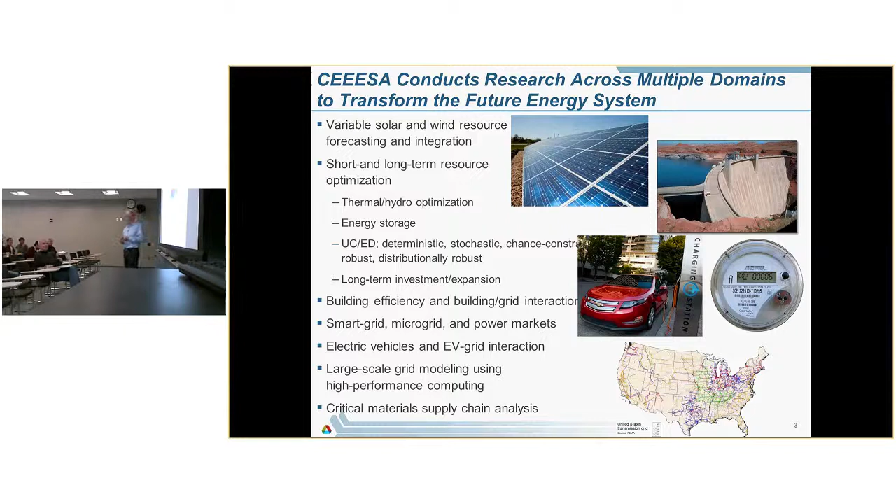And the group that I work in, the Center for Energy, Economic and Environmental Systems Analysis, we do work across a range of areas within power and energy systems. Some of them are listed here. From forecasting of renewables to optimization models for planning and operations of the power grid. And also, more recently, we are getting into things like cybersecurity, grid resilience, and also we have some large computers that we sometimes try to apply on power systems problems.

Okay, so what I plan to do today is I have a few slides first, which show some of the work that we have been doing on integration of renewables. And then the second part is more on energy storage. That's a relatively new project. So that's definitely work in progress, but I'll show you some preliminary results where we're looking at stochastic unit commitment with energy storage. And also a model where we try to optimize the energy storage bidding into day-ahead and real-time markets under uncertainty in prices from the storage owner's perspective.

Okay, so some of the motivation for this work, as you probably know, the U.S. power sector is a significant part of the economy, and perhaps more importantly, it's a large emitter of greenhouse gas emissions. And there has been and still is a rapid change towards more renewables. The installed capacity in the US and worldwide of wind and solar are shown there. And these are starting to have some fundamental impacts on how we operate and plan the power grid.

So one example here is from MISO. I guess we are in the MISO area now, right? Back at Argonne, we are in PJM, but here we are in MISO. So this is hourly wind power output a couple of years ago in MISO. So there is definitely variability over the course of a month here.

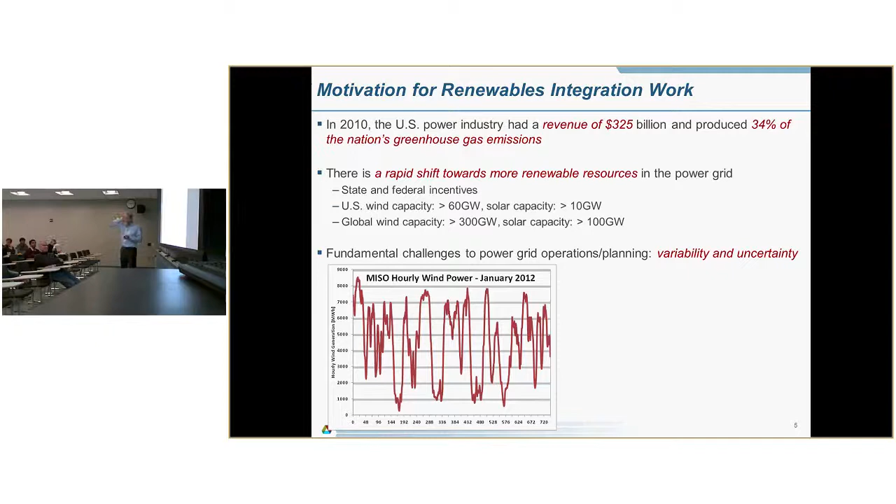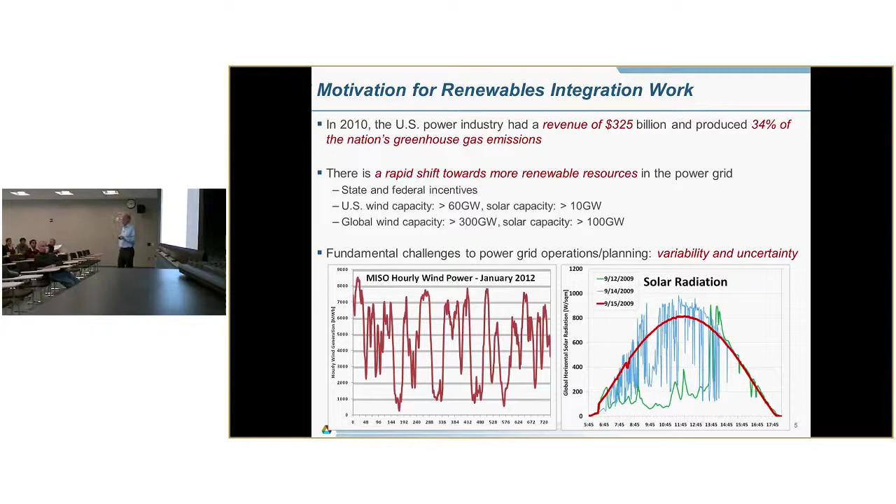For solar PV, this is just for one day, one specific site, the irradiance. For a sunny day, the red line. For a cloudy day, the green line, and then a day with intermittent clouds, which is the blue line, which is very hard to forecast, at least for a single individual site. So the key is to address these variability and uncertainty issues in power grid planning and operations. And also these things have impact on electricity markets.

The argument is that in addition to making a deterministic point forecast for how much wind power you will have for the next hours and the next day, it's important to estimate the uncertainty in the forecast. And we have been looking at one method which is called conditional kernel density estimation, where you establish a relationship based on historical forecasting errors to make a forecast which is conditional upon certain explanatory variables.

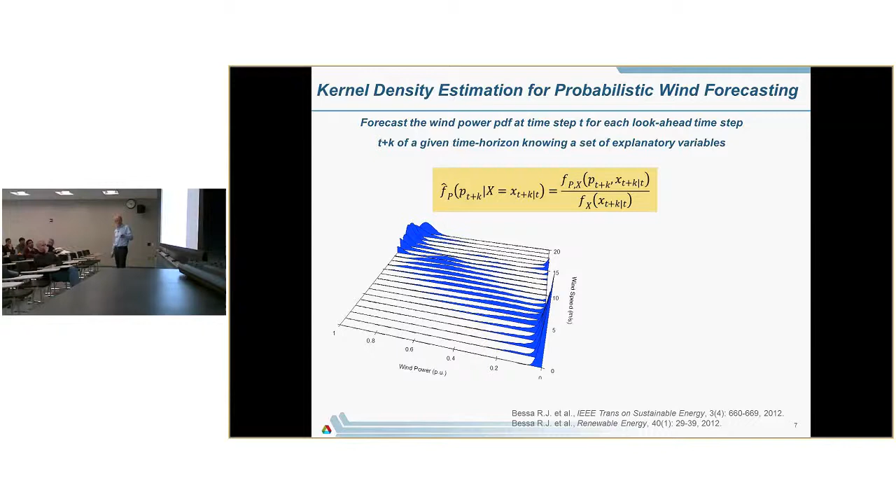And one example is here: if you have wind speed on this axis and then power production on this axis, if you are in the middle range here, you have a wide probability density function. You have more uncertainty than what you have with lower and higher wind speeds, because that's where you are at the steep part of the power curve.

So if you establish this relationship based on historical data, you can forecast the wind speed, and then you can derive a probability density function, which may look something like this for the amount of wind power that you'll get for a certain point in time in the future. Let me ask you a question. If the wind speed is 0, how could you get non-zero power? So the reason is that this is forecasted wind speed. Oh, that's forecast. Okay, right. So there is uncertainty in this observation here.

So which is the vertical axis, the one perpendicular to the plane? You mean in the right-hand figure or in the left-hand? Yeah, to the right. What is that? That's a probability density function. So we have forecasted wind power here from 0 to 1. And that's just the wind power then? That's a probability. It's a PDF basically. So the area under the curve is 1 here.

So on the left graph, the vertical axis is forecasted wind speed, and is the other axis actual wind power? Yes, that is measured wind power. Okay. So you're relating forecasted with measured. Yes, and you can do this in multiple dimensions, but wind speed, of course, is the most important explanatory variable. So that's one piece of the puzzle that we've been working on.

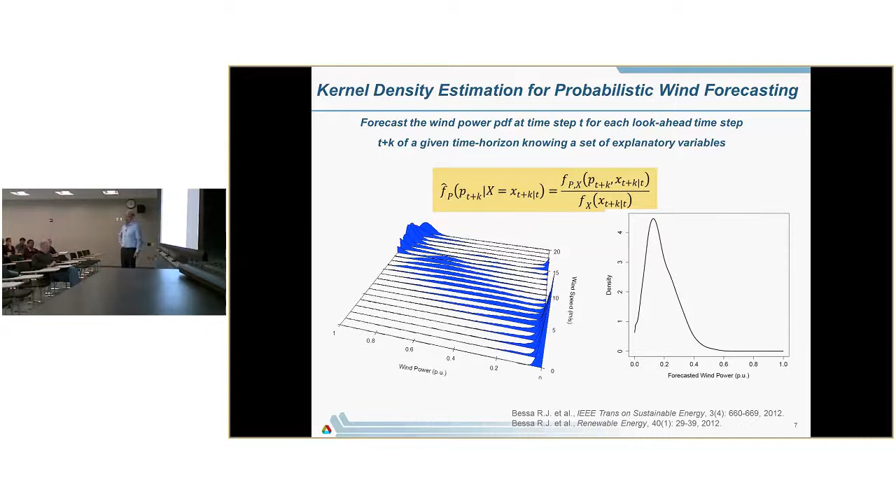Per unit is what? Based on the rated capacity of the wind farm. So we typically do this for one wind farm. So if you have a 200... So is this a wind farm forecast? Is it like for say 100 machines? Yes, something like that. That's right. But it's one location.

I want to mention that we also have moved into solar power forecasting. This is a relatively new project, which is led by IBM, and they are applying machine learning methods. You can see the name Watson, similar to the Jeopardy a couple of years ago. So the idea is to use machine learning and big data to come up with better solar power forecasts. And then there is an important intermediate step: you have to forecast the irradiance, which you don't have in wind power forecasting.

But in our group, most of the work that we are doing deals with the power grid and how to make use of this information in operational and planning decisions. And one of the ideas that we have worked on, along with many others in recent years, is stochastic unit commitment. Traditionally you do the unit commitment as a deterministic problem. But you introduce uncertainty through forecasted scenarios, and you minimize the expected operating costs over a range of scenarios, subject to the regular constraints that you have in unit commitment and economic dispatch problems.

And you can apply this at different stages of market operations, from day ahead to what's called reliability commitment to real time. And we've been trying to compare the stochastic approach with dynamic reserves and simulated the system over time to see which of those approaches gives you the lowest operating costs.

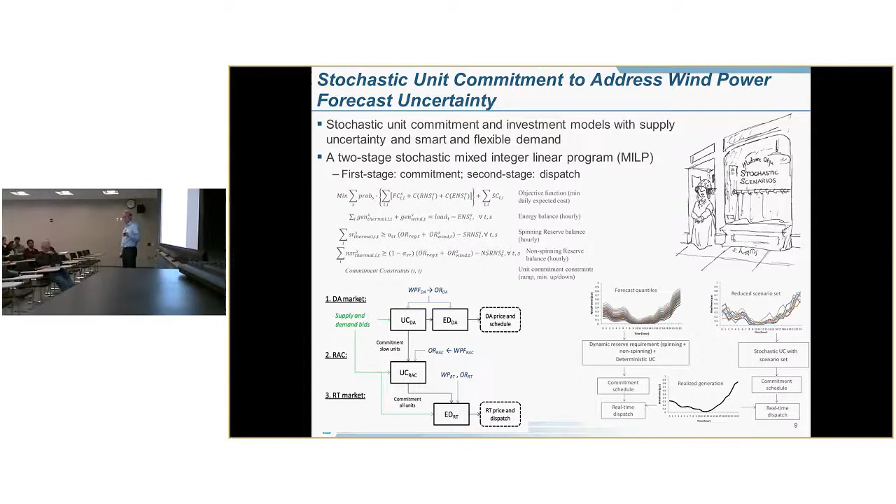Yeah, but it depends on the quality of the forecast? Is that what you're saying? It depends. So we have a forecast that looks something like this here with forecast quantiles. So we look at how wide that distribution is. And based on that width, we determine the amount of reserves that we impose on top of the unit commitment problem. So you're working on a 24-hour horizon, right? Yes, that's right.

And we've been looking at some alternative formulations of the stochastic unit commitment problem as well. Traditionally, you do this in 2 stages: commitment first stage, dispatch second stage. This is work that we've done with Professor John Birge at the University of Chicago, where we have a more flexible representation of commitment decisions, and we basically show that you can reduce your operating costs by using a more flexible stochastic unit commitment decision. I'll get back to that later in the talk, actually, with energy storage.

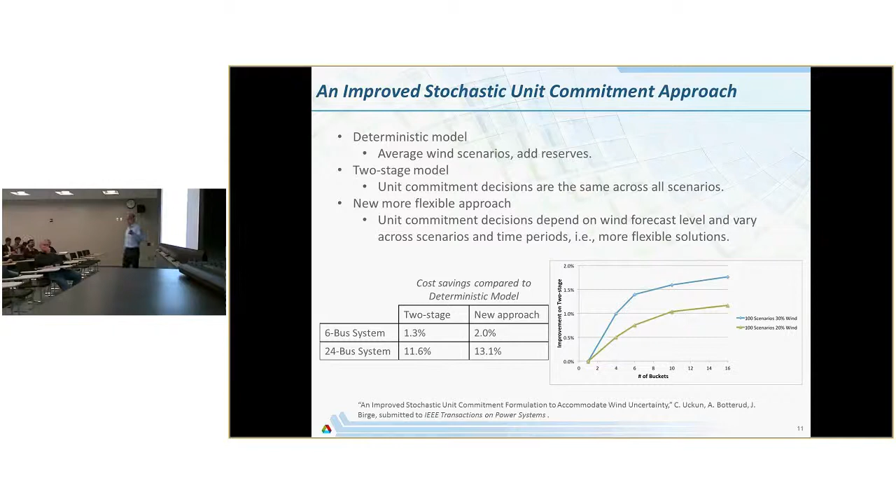Another aspect is that typically operating reserves are just fixed requirements, but from an economic and market perspective, the value of those reserves depends on how tight the overall supply-demand situation is in the market. So another idea that we've been working on is to derive demand curves for operating reserves, downward sloping demand curves, which also reflect the uncertainty in the wind power forecast.

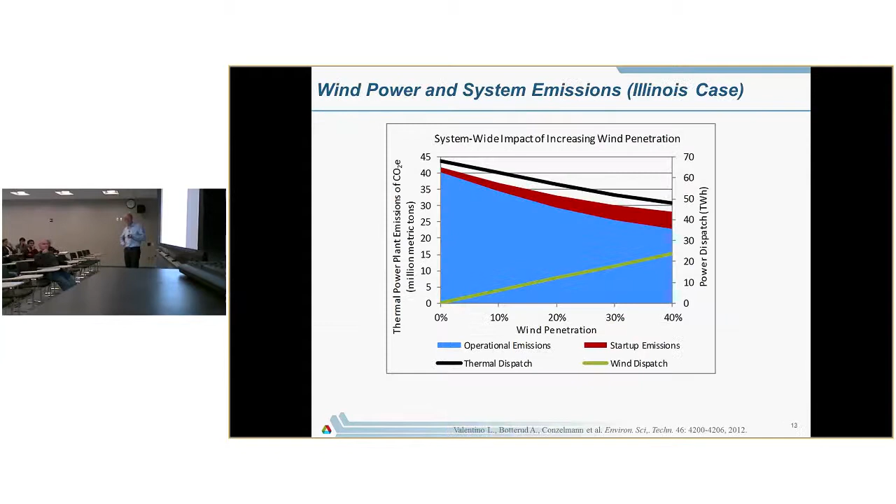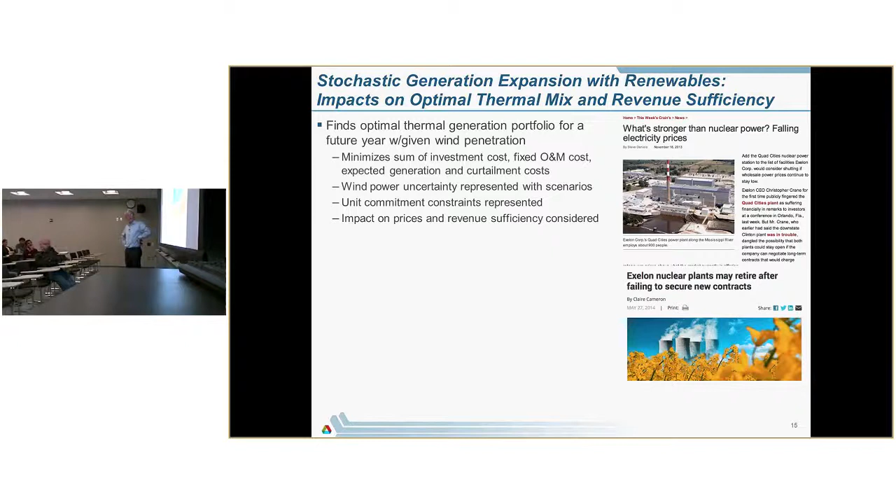Another thing we've been looking into is longer-term expansion planning, and the fact that baseload plants, in particular nuclear, are very concerned about making a profit when you get more renewables that tend to drive down prices. So we have some modeling work where we look at optimal generation expansion in a longer-term perspective with increasing levels of wind power. So here you go from 0 to 30% with 4 different assumptions, and you see what kind of power plants you tend to build from an optimal planning perspective for different wind penetration levels. And down here, for low penetrations, you build a little bit of baseload coal, but as you get more renewables, you switch to combined cycle and natural gas entirely.

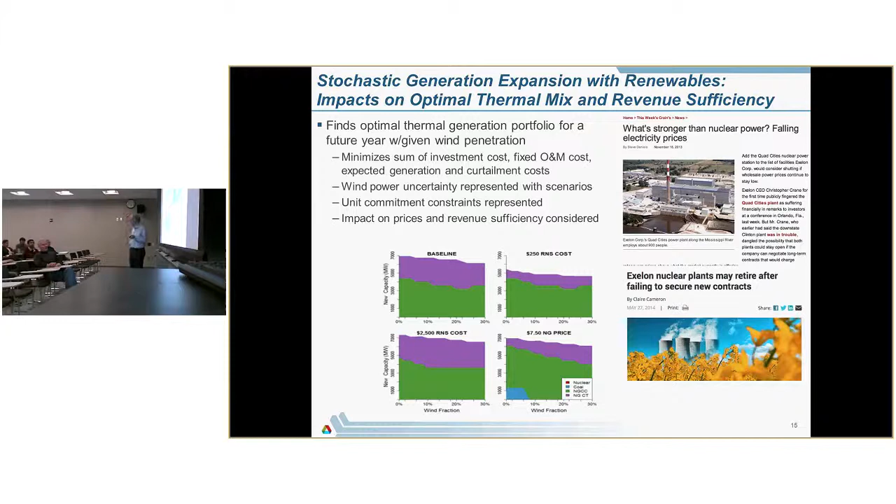And a related part of this story is that this impacts the prices and the revenues in the market. And the short story there is that if you are a baseload plant, it's likely that you're getting into trouble as you get more renewables in terms of covering your operating costs through market prices. If you are a flexible combined cycle or gas power plant, you are more likely to make a profit.

But let's move on to the energy storage challenge here, and how energy storage can be used when it comes to integration of renewables. This project is a relatively new one, so I should say that the results that I'm going to show you here are preliminary, and I'd like to point out Nan Lee from Arizona State University and Deepak from Iowa State. They have been working with us this summer, and they have done most of the modeling and simulation work that I'm going to show you. So they deserve praise for that. And then we have some people across different divisions at Argonne supporting this project.

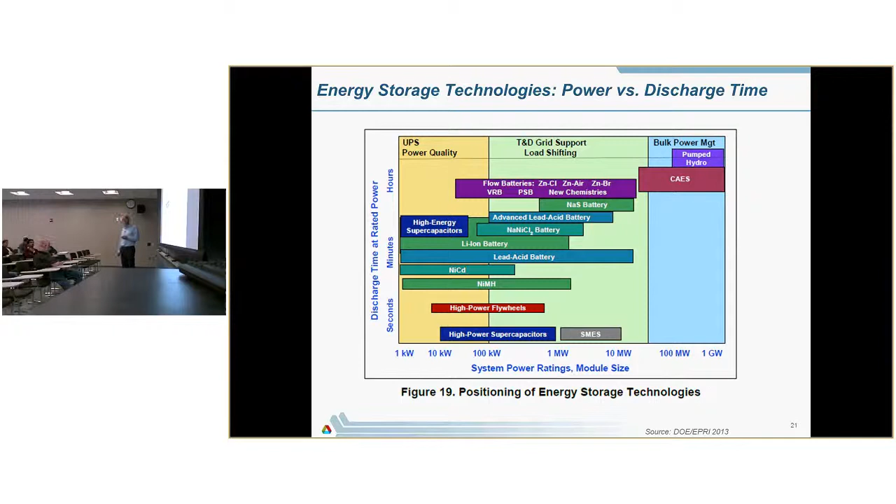And there are comparisons out there on costs and performance of these different technologies. This one is a couple of years old, comparing different batteries with pump storage hydro and compressed air energy storage in terms of lifetime, efficiency, and different ways of calculating capital costs. Whose chart is this? That's the International Renewable Energy Agency, I think.

The short story is that, again, pump storage hydro is really the technology to beat here. It has the longest history, the longest lifetime, and tends to have the cheapest cost as well. And if you look at the amount of energy storage in... Do you trust that figure? This one? Because I just don't think of pump storage as being very cheap.

Well, everything is relative. It depends on what you compare them to. Talking in terms of my type of money. Because the capacity factor of those pump storage plants is very low, typically speaking, and they're extremely expensive to build. I also think that we're running out of possibilities, at least in the developed world.

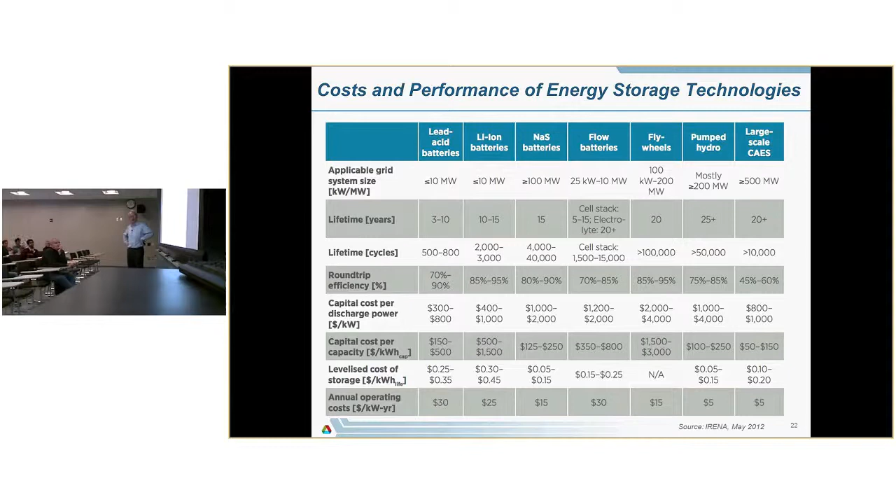At least we can agree that right now, almost all the energy storage capacity in the grid in the US as elsewhere is pumped storage hydro. And then you have a few small examples of batteries coming online, and there is a lot of interest in that, of course. So it's a growing market, but so far it's really pumped storage hydro which is the big technology.

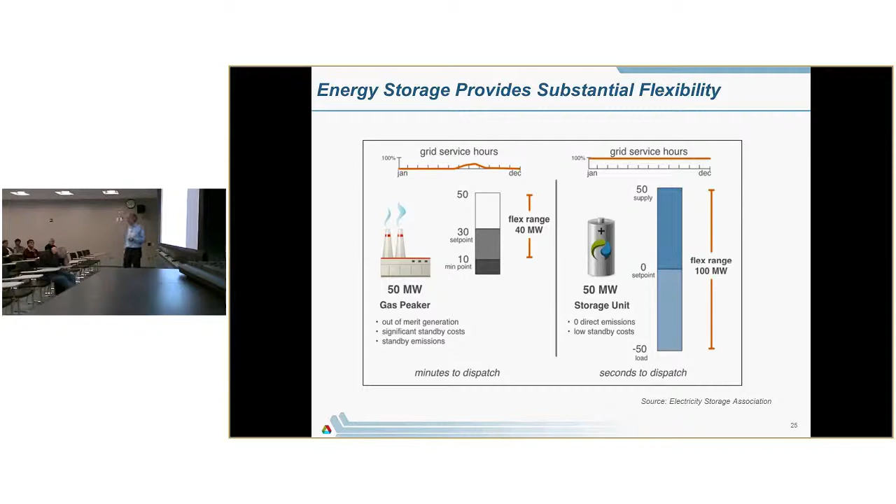For the battery, you can move in both directions. So you have a much wider flexibility range, which is valuable. Another thing is that the battery is always available, whereas the gas peaker, the ability to provide spinning reserves or regulation is only there when you are committed and online. So that's important to keep in mind, that the battery can really provide services continuously.

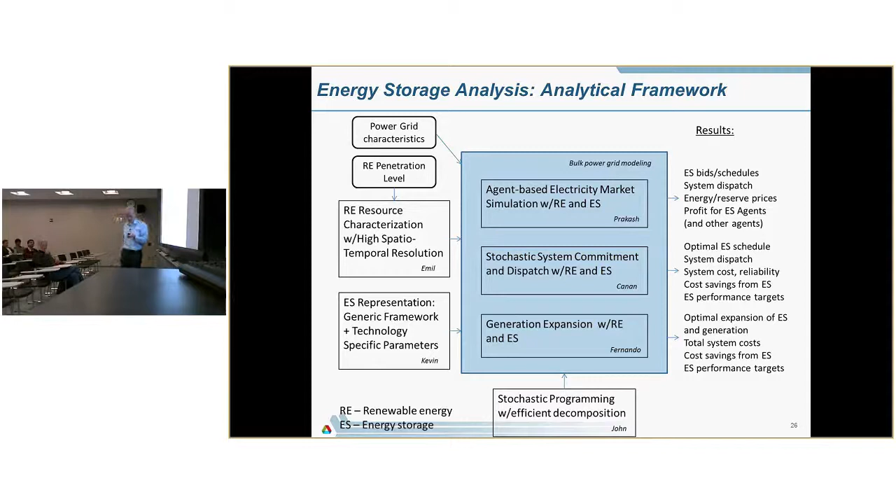So in terms of generating renewable scenarios, we are working with colleagues at Argonne who run numerical weather prediction models. So they can simulate the weather across a big or small domain. And like in this case, you use a model to generate a forecast. You compare that to observed weather variables. And based on that difference, you can estimate a stochastic process using something called Gaussian process modeling. And from that, you can move to scenarios for wind and solar power for the next day.

So that's one piece of the puzzle here. But it's important how you characterize the resources in an adequate manner, and that's sometimes, I think, forgotten in the power world, that we don't pay attention to how this is done.

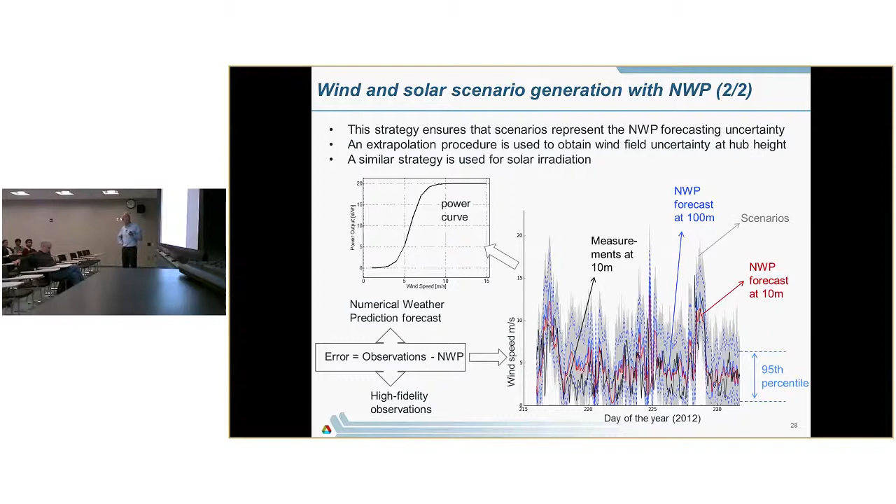You need the Gaussian assumption? Good question. That is a limitation here, but the advantage of using that approach is that you can model the uncertainty as a function of multiple variables. So you can handle many more dimensions with that assumption. We do have another approach, kernel density estimation, which is non-parametric. So for few explanatory variables, that's a better approach.

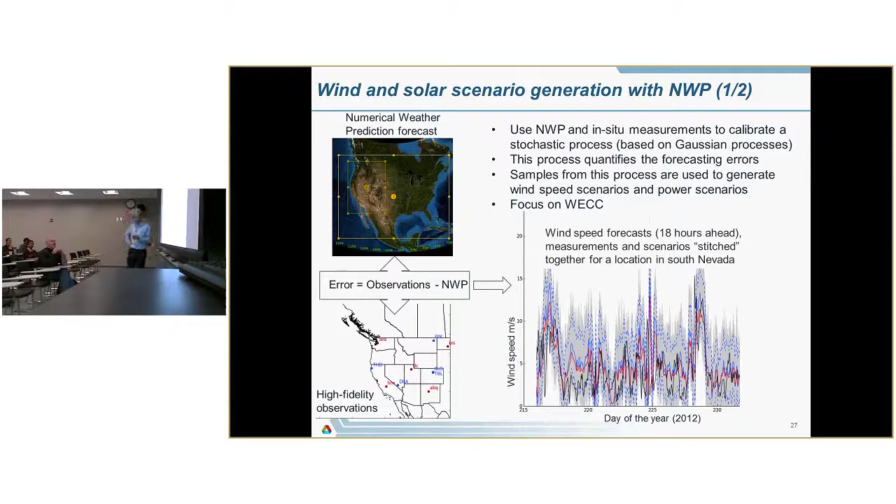So, okay, let's get to the commitment and dispatch decision. So in this case, we assume that energy storage is a system resource that is used to balance supply and demand in the grid. And we look at two stages, day ahead and what we call post-analysis stage, or more like real-time dispatch. At the day ahead stage, we do a stochastic unit commitment with wind power uncertainty. And then we simulate hour by hour the dispatch, more like in real time, using Monte Carlo simulations based on those. Uncertainty in the system, the wind? Yes, so far. In this example, it's only wind.

And in the stochastic unit commitment problem, we try to minimize the expected production cost. It boils down to a mixed integer linear programming problem. We impose some reserve requirements, regulation, as well as you need to maintain contingency reserves for the largest single generator. And then instead of using a two-stage formulation, we split the forecasted wind scenarios, which is illustrated here, into multiple time segments for the next day.

And for each time segment, we split that into what we call buckets. So instead of assuming that commitment decisions are the same across all the scenarios, which you do in two-stage stochastic unit commitment, we impose those constraints only for the individual buckets here.

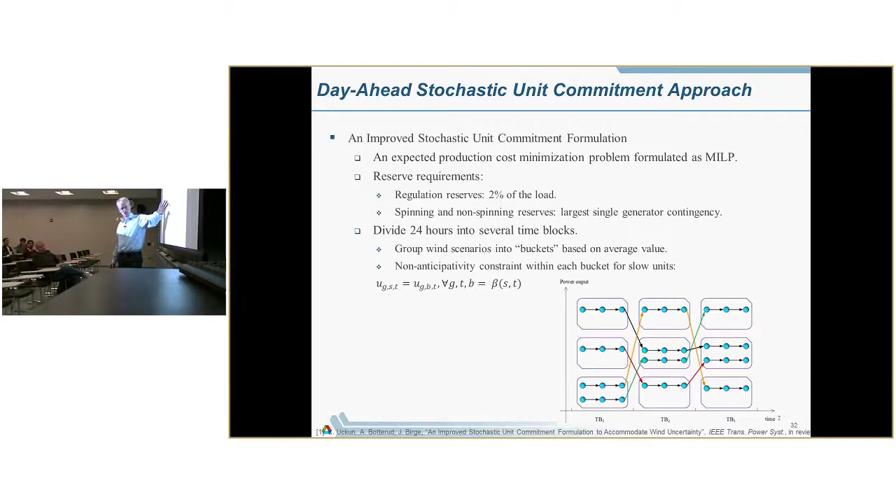Can you tell me what the reference is when you say it improved over what? Yeah, it's actually another paper that is under review right now, but it's... No, but I see that. What is the reference that you're improving over? So the first reference is a deterministic model. But then the more relevant benchmark here is a traditional two-stage model, where you don't have this time segments and bucket approach. So you just have the scenarios, and this builds more flexibility into your strategy. So that's what we compare here, and we do see significant cost savings.

Does everybody who works in unit commitment understand what it's an improvement over? Because probably not, no. Because I certainly don't know what the reference is. Right. So, yeah, that's a good point. But there are lots of people working, at least on the research side of things, on these types of formulations. So if I don't know with respect to which one you're improving it, then I don't know how to judge. Well, the reference is more from a stochastic programming formulation perspective, a standard two-stage stochastic program. Because if John Birge is involved with this, then he's improving on his previous work.

Yeah, because he's been in this now for 25 years. Sure, yeah.

That is true. But the ideal solution, though, is to do stochastic dynamic programming, where you represent how the uncertainty unfolds for all time periods of the next day, for each individual hour. You have scenarios that branch out, but that becomes too computationally demanding to do. So this is kind of in between multi-stage and two-stage stochastic programming.

But what I want to say is that also when it comes to real-time operations, we use the solutions from these individual buckets to guide the operation of the storage device in real-time operations. So that's...

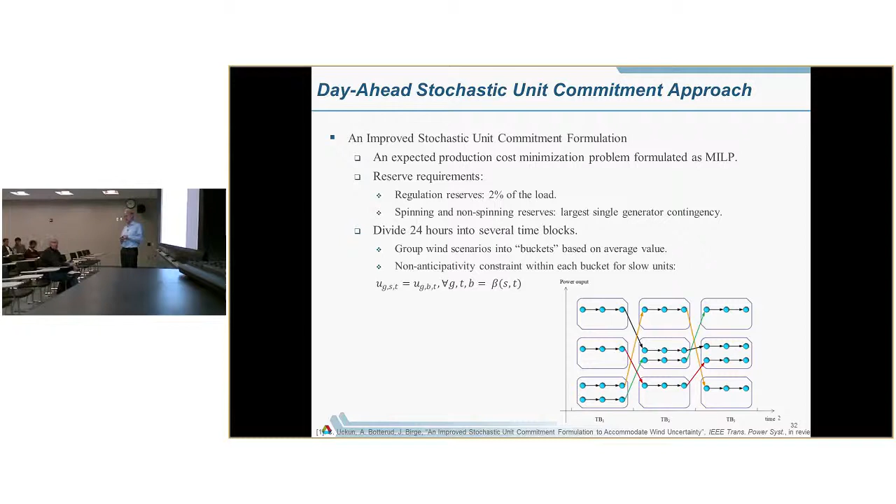Okay, so this is the case study where we generate a bunch of scenarios. We optimize for 20 wind scenarios in the day ahead stage using this approach I just described. We use one of the standard test systems, the reliability one. And we vary the amount of wind power from 15 to 25%. And we have one battery located at one of those wind farms here.

And the constraints for the battery are shown here. It basically takes care of the energy balance. And also it makes sure that the battery can provide energy as well as different types of operating reserves. So that's kind of captured in the set of equations here.

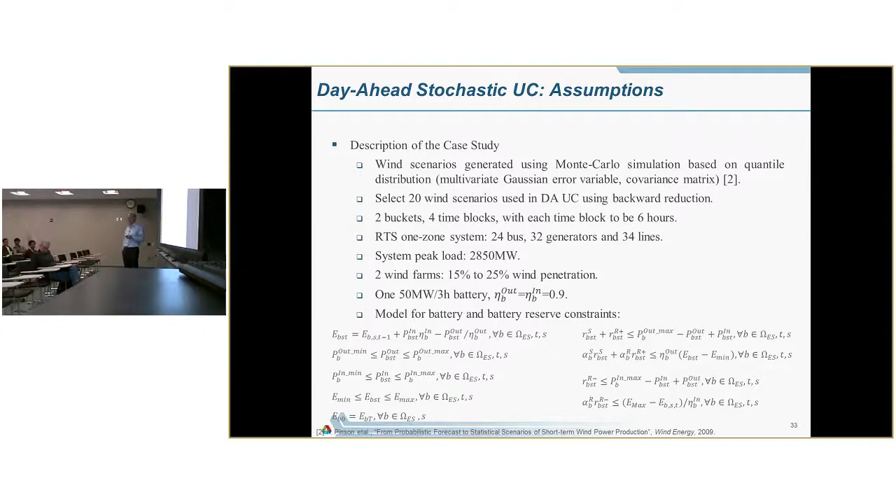Wait, you said that the battery was a system resource. Yes, that's the assumption. Why would they have to place it at the wind farm? Well, right, no, it wouldn't have to be placed there. That's just our assumption. We didn't look at optimal placement, actually. That may be elsewhere in the system. That's a good point.

Okay, so here is the summary of day ahead results. And we can compare: the upper part of the table is with energy storage, the lower part is without energy storage. And you can see that the system cost is reduced quite significantly. That's what's shown in the graph on the right here. So by introducing energy storage, you get around an 8 to 9% cost saving compared to the case without energy storage.

So that's the total system cost, and this is just for one day that we are looking at so far. And you can break that down into more detailed results, like the amount of wind curtailment, which tends to go down, the amount of reserve violations, which has a penalty, and actually is slightly higher with energy storage here. But the cost is substantially lower with energy storage in the system.

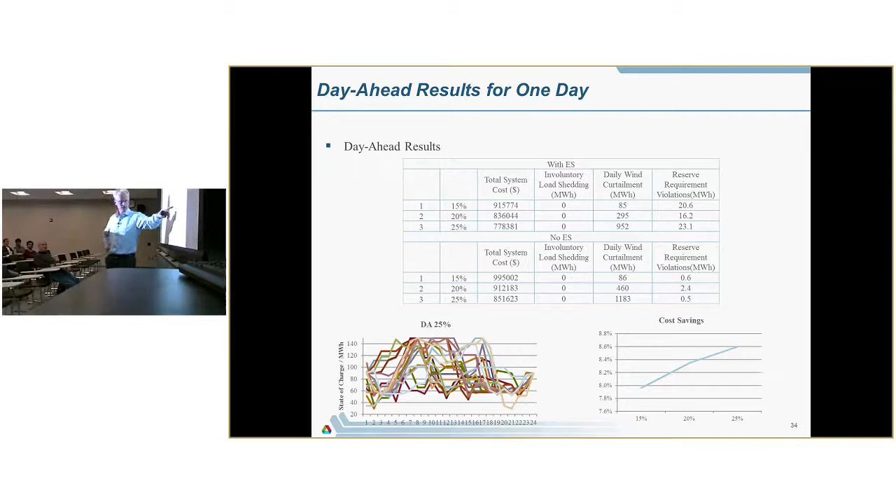All you have is 3 values, right? Sorry? In this graph, all you have is 3 values. Yes. You have minor parametric sensitivity. No, it's really 3 bars. It's 3 points. Yes. That's right. And is that the penetration of the wind? Yes, correct. That's the wind penetration from 15 to 25. And this is how the state of charge of the battery varies across those 20 scenarios. And it's the expected costs in the table above there.

So, the next step would be to compare these cost savings, and then calculate what would be the required cost for the battery for this to break even as a potential solution. But we haven't done that yet.

How big is the battery again compared to the total capacity? The battery is 50 megawatts. 50 megawatts. It's 3 hours, so it's 150 megawatt hours. And the peak load is, I think, close to 3,000 megawatts. And for the wind power, I don't know the max capacity, but the energy contribution is the percentage there. Okay.

What kind of charge-up time do we have with that battery? It is a 3-hour battery, so it's symmetric. Yes, that's right. That's the assumption. 90% efficiency, both directions. So that's the cost savings at the day ahead stage.

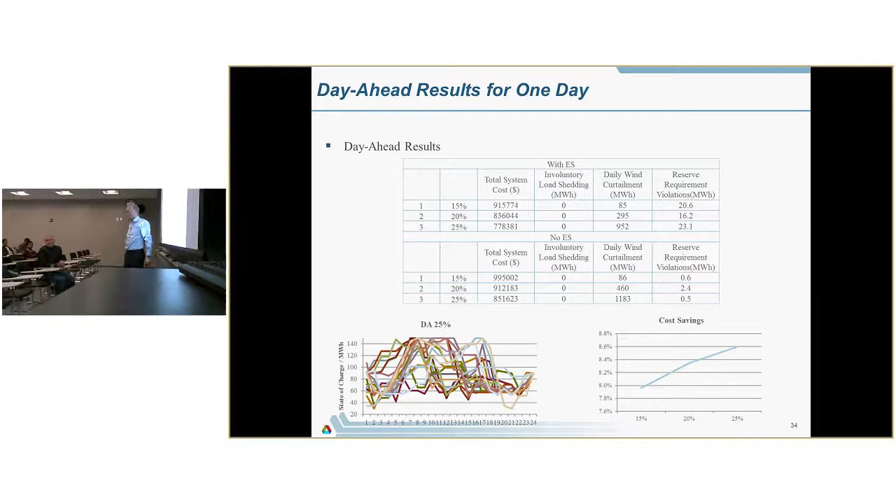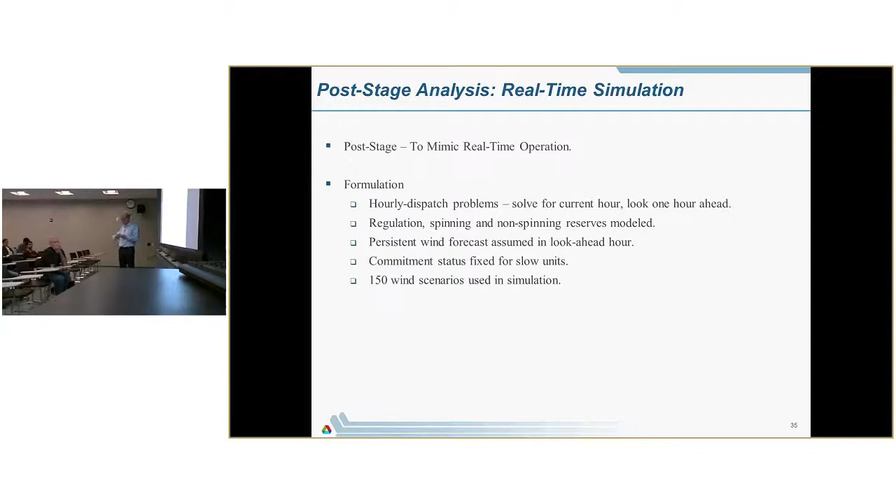Okay, and then we also run this through the real-time simulation, and then we do this as a dispatch problem, but we only look 1 hour ahead, so it's limited foresight. We go from hour to hour, and we use a so-called persistent wind power forecast. The assumption is that the wind power will be the same in hour 2 as in hour 1, basically, and we simulate across 150 scenarios.

And then the question is, how do you represent the energy storage use in real-time economic dispatch, given that you only look 1 hour ahead in this case? That's the assumption. The renewables are still uncertain. Do you just pick a solution from the day ahead model, or do you impose some kind of bounds on where your energy storage device can operate? So we are exploring different ways of connecting the day ahead solution with the real-time dispatch.

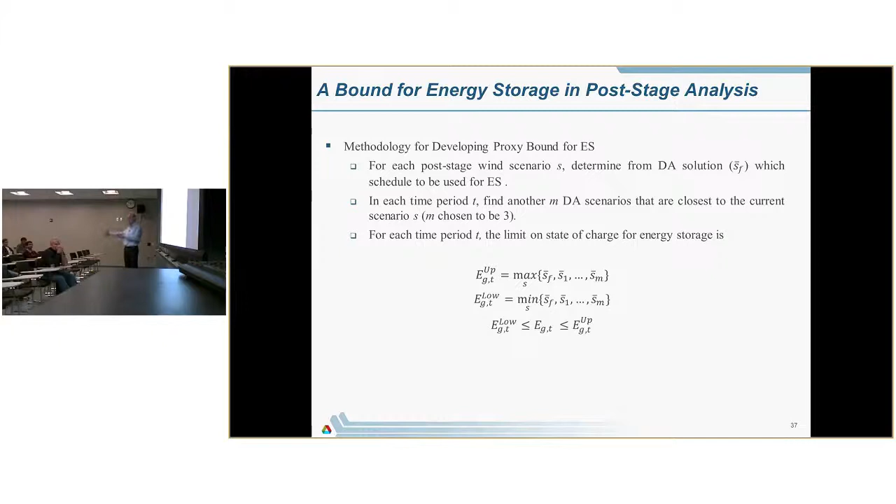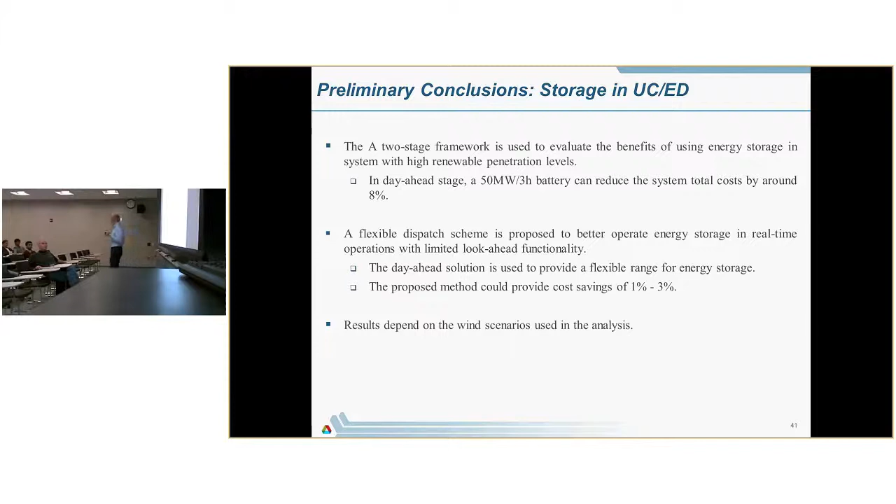Okay, so I have another final topic here, but it's approaching 5 o'clock. Should I just give the conclusions of this one maybe, or?

Yeah. Okay, so just briefly here, the idea is to optimize energy storage based on prices. And basically what you want to do is to take advantage. Now you're changing totally directions. Yeah, well, it's still energy storage. It's no longer a system resource. That's right, yes. Exactly. It's still energy storage, but no longer a system resource. The objective is to maximize the profits from the day-ahead and real-time markets. So we assume that you can offer into both of those markets.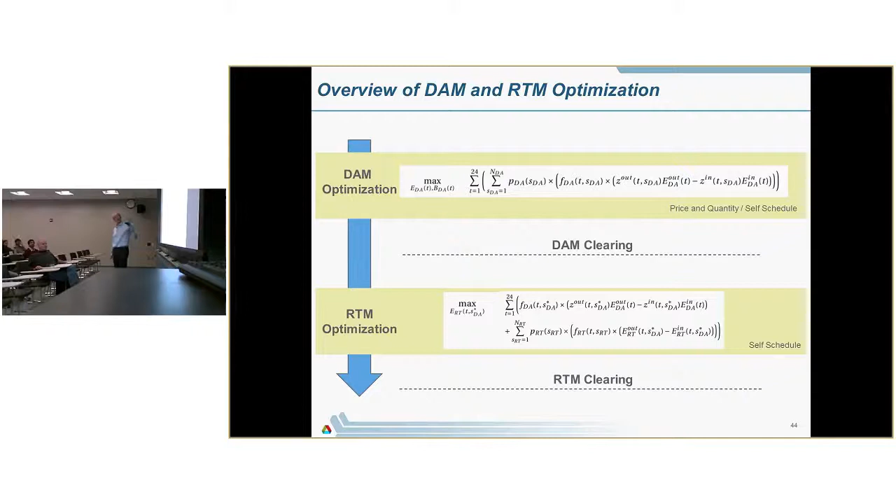But the short story is that you can look at profit from the day-ahead market, profit from real-time market, and combined profits. Our hypothesis is that if you own a battery, you are looking for price differences. You want to buy when prices are low and sell when prices are high. So by operating in both day-ahead and real-time markets, you have more opportunities to take advantage of such situations. So it's advantageous to bid both in day-ahead and real-time markets. On top of that, if you operate in both markets, you can also take advantage of potential energy arbitrage between the two markets.

Are the discharging rates correctly represented here in terms of the real time? Because you have only 5 minutes. Well, no, it's very simplistic so far. The real-time model here is actually doing optimization ahead of time. So you optimize for all the 24 hours. And you use the first 5 minutes? You optimize for all 24 hours, so it's still hourly time resolution. So when I say real time, it's not really 5-minute real-time dispatch; the market settlements are still done at hourly time resolution. It's a rough approximation. But the conclusion I think stands that you want to take advantage of price arbitrage opportunities in both markets.